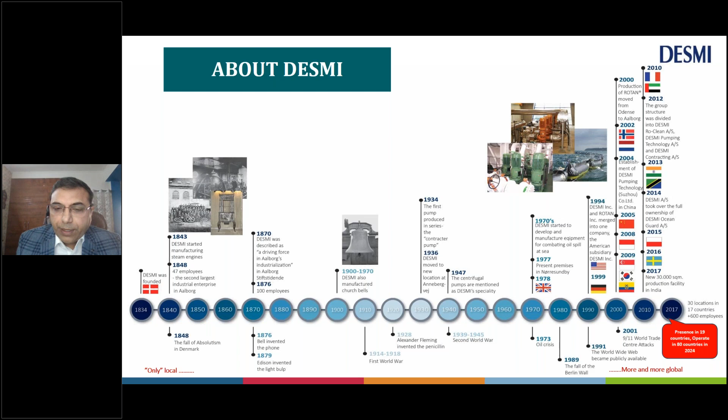We operate in primarily 5 verticals. These are called marine and offshore, where we make marine pumps for the shipping industry. Then coming to the industry vertical, where we make pumping solutions for the industry.

EnviroClean is the vertical wherein we tackle the issues of oil spill at high seas, the problem of seaweeds on beaches, and then the problem of marine debris, which is what I'll be concentrating upon.

The fourth vertical is defense and fuel. In this vertical, we make pumping solutions for the defense industry. We have our pumping solutions working with almost 25 navies of the world. Then we have the utility vertical, wherein we make pumping solutions for various HVAC industry, district heating and district cooling, those kind of applications.

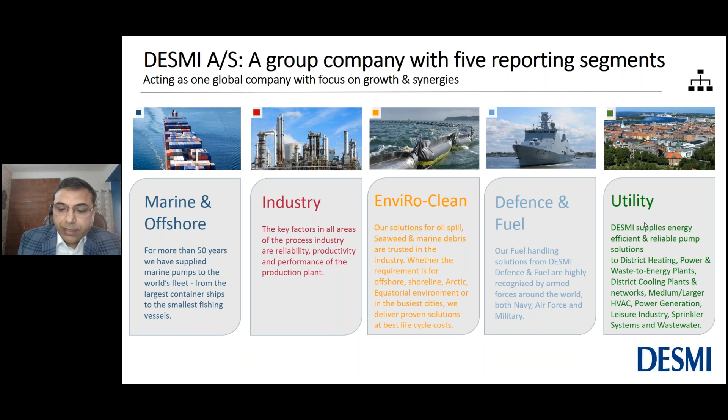So coming to the problem of marine litter, this is a picture which has become very, very common in Southeast Asian part of the world. And if these are the images that motivate you to work for the environment, then we are here for you.

There are some well-known facts about how the marine litter issue is affecting all of us. The first is that marine litter presents a huge problem in our oceans, with scientists sometimes warning that by 2050, the quantity of plastics in the ocean will outweigh the fish.

Very concerning. The marine litter or the plastic litter enters the marine environment because of a wide range of land and sea-based activities. This is where we have concentrated, and this poses harmful effect on marine life, biodiversity, tourism, fisheries, shipping, as well as negative impacts on human health.

5.25 million plastic particles weighing 268,940 tons in total are currently floating in the world's oceans, and these are increasing every day.

80% of our pollution in the ocean comes from land-based sources, and most developing countries dispose 90% water and 70% of industrial waste gets discharged into the sea untreated. So this is about how big, how grave the issue of marine litter is.

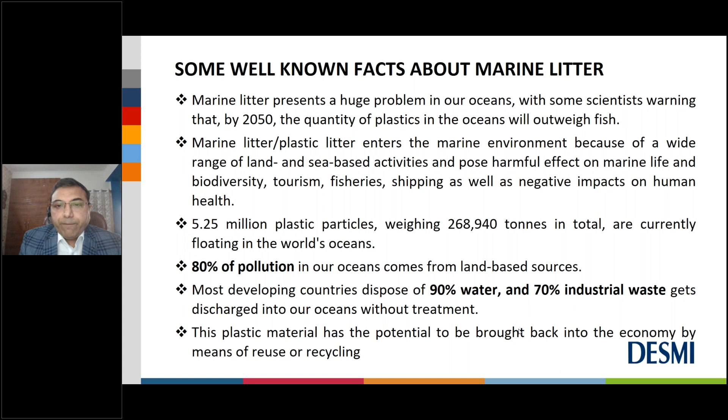So this is how the marine litter flows. It starts from the household. The data proves that even despite having the best of garbage collection mechanisms in our cities, still we are able to collect only say 40 or 50% of the garbage that is collected from home and disposed of properly.

Otherwise, whatever does not get collected gets disposed into the marine bodies, and it flows from one stage to the next, and ends up in the river or in the ocean.

Where DESMI EnviroCare concentrated was, we already have plenty of solutions, as you can see a few pictures down below, the floating trash skimmers. This space was already very cluttered, it was not very green, and it could not be deployed on a daily basis.

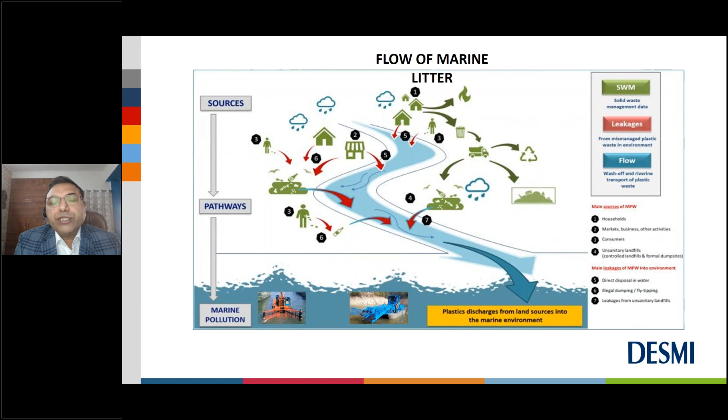It's an expensive activity to collect trash from floating trash skimmers. So we concentrated a little upstream. We said, why not concentrate from the source itself, and that's how our solution got generated, which I'll be covering in the subsequent slides.

In case the DESMI equipment is not there, here's how marine litter upstream is collected. As you can see in a few pictures, this is how it was being done in India, and I'm sure if automatic equipment is not used, probably this is how it is collected in most countries.

We use iron screens to stop the flow of water, and if it is not cleaned on a daily and regular basis, it becomes the primary cause for silt deposition and flooding. These are fixed structures which take time for both installation and uninstallation.

Then we use excavators to clean, which can be done occasionally because this has a hiring cost and it is operated on diesel, petrol, or whatever fuel, and it is not environment friendly, or it is done manually. These processes may have low capex, but they have high operating expenses. They leave carbon footprints and may disrupt traffic operations when we deploy them.

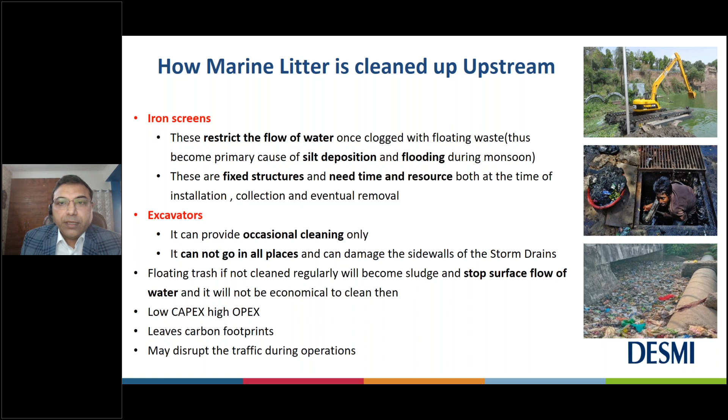That's how the EnviroClean division of DESMI was founded. We divided ourselves into three categories. One was the seaweed division, second was the oil spill response division, and the EnviroCare division.

Our seaweed division looks after the issue of seaweeds, which becomes a problem for countries where beach tourism is one of the primary sources of income. These seaweeds invade the beaches, and the beaches do not remain tourist friendly thereafter.

So we have solutions for seaweeds, wherein we not only contain the seaweeds but collect them and transport them at least 200 to 300 meters away from the sea, where they can be processed to get some kind of resource out of it.

Then we have the oil spill response team, wherein we have lots of equipment for removing oil in case of a spill. Coming to EnviroCare, which is where I will now concentrate in further slides, we do the job of containing marine debris and recovering it on shore.

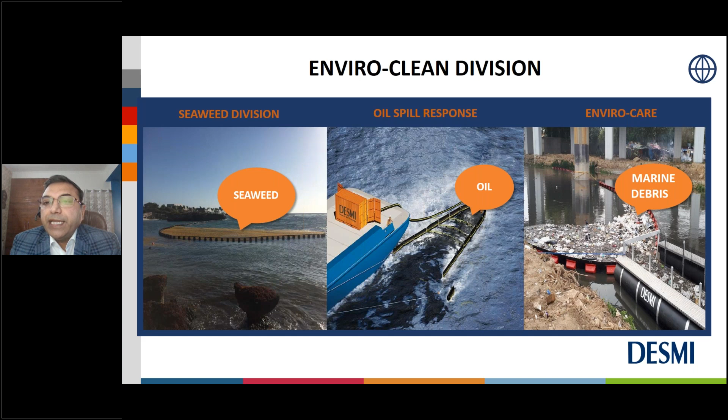We have certain equipment to do the same. The first in the series is the Enhancer series.

The Enhancer series, as you can see in the picture, is basically a steel basket housed inside a pontoon. This pontoon is made up of foam-filled HDPE pipes, which have very good flotation. On top, we have checkered aluminum plates so a person can move on it, and a steel basket in between with a hook on top that can be lifted.

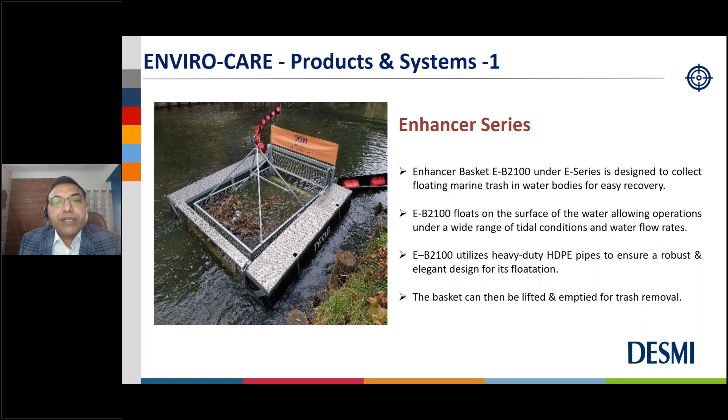So how it works is what I will show in the next slide. It has a video.

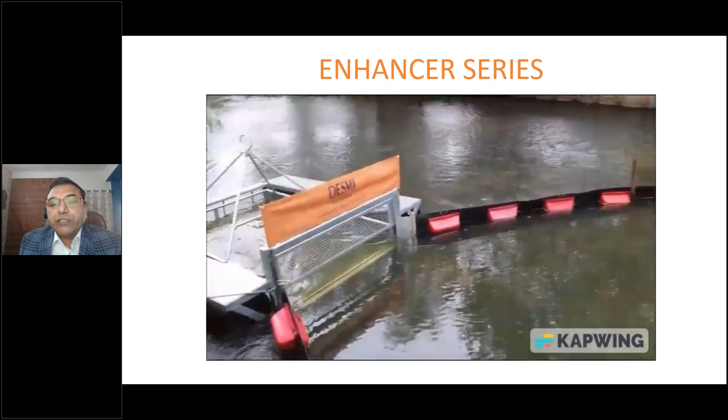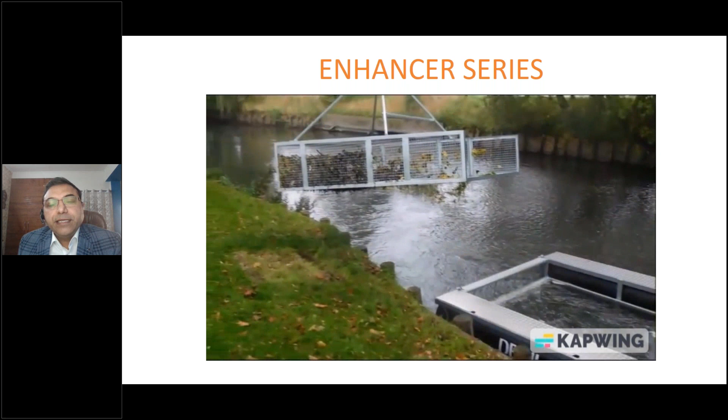The black and red color structure you see is basically a floating trash barrier. We put this across the width of the drain, and with the surface flow of the water, the trash comes inside this basket. The basket is then lifted, emptied, and put back.

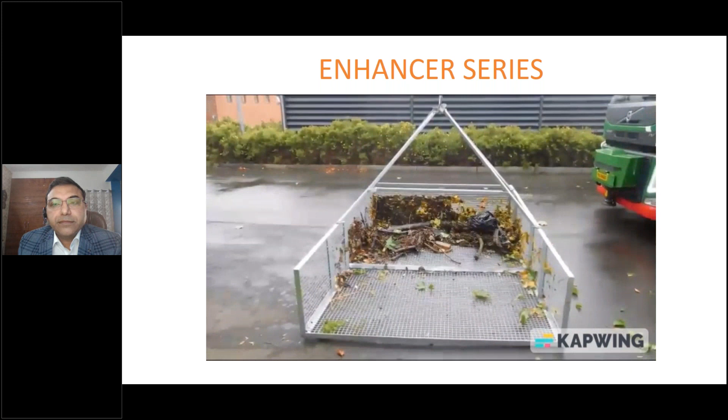The Enhancer basket had a capacity of 1 ton.

Coming to the second system, this is called the Rise series. Since in the Enhancer system we had to use a crane, which has to come alongside the system to lift up the trash, we devised a new methodology.

The Enhancer series was a little economical, but the Rise series addresses the problem of not having a crane. Many times municipalities may not have access to a crane, or hiring one becomes very expensive. So we came up with this automatic solution for collection, containing, and recovery of floating trash.

In this system, as you can see on the screen, we have two sets of conveyors. The first, following my arrow, is a wire mesh conveyor placed inside the water. Then we have another blue color conveyor, as you can see.

With the surface flow, everything comes onto the wire mesh conveyor where the water is drained out. It's almost dry, without any liquid content, and is dumped onto the blue conveyor, which transports the marine waste into a municipal bin, or we can modify it to place waste directly inside a dumper.

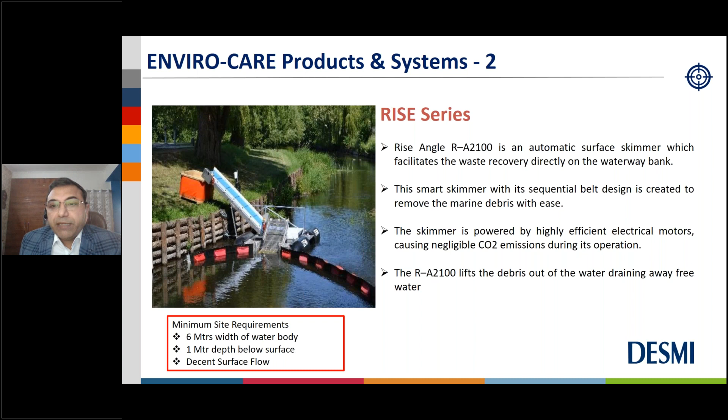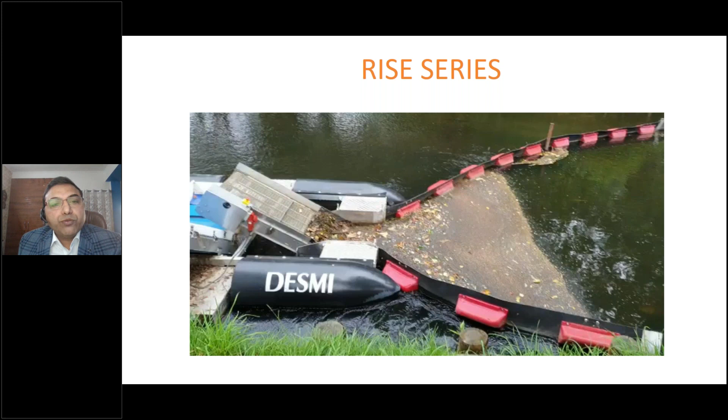I'll show you a small video of this as well. As you can see, the trash barrier has been placed across the width of the drain. The trash is forced into a bottleneck kind of position, and it comes onto our wire mesh conveyor, and this is how it gets lifted.

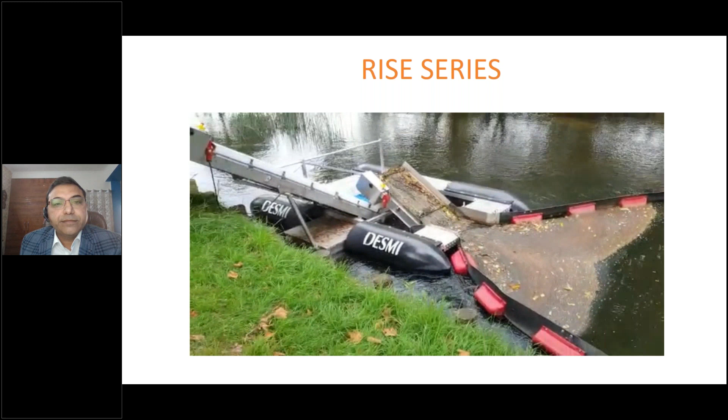The blue conveyor transports it directly into the municipal bin, ready for shifting, and this can also be done for municipal dumpers as well, in case it's required by the customer.

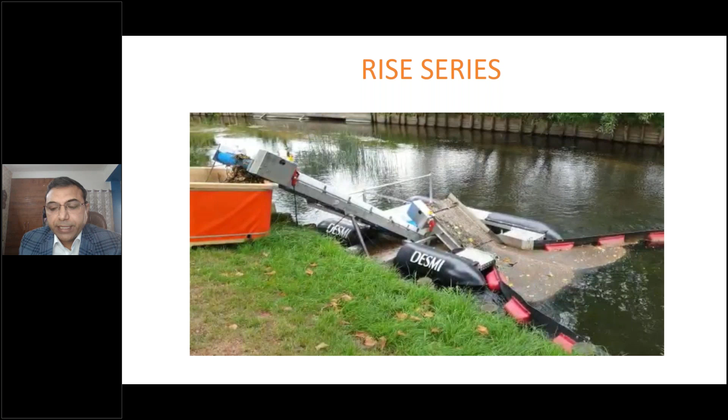Coming to the advantages of the DESMI RISE system observed over the last 4 years, the first and most important is daily cleaning. If we use excavators or iron screens, the cleaning activity is done at maximum once every 3 months, or before the monsoon. But with the DESMI RISE machines, you can do this cleaning on a daily basis.

This reduces the chances of flooding. Rains will come unabated, and there may not be forewarning. If an iron curtain is placed inside the drain instead of a DESMI RISE system, marine litter can clog it, and when it rains the water doesn't find a way out, the level rises, comes onto the street, and starts going inside the houses. Whereas with the DESMI RISE system, we have observed flooding instances in those areas have reduced drastically.

Similarly, if you allow the trash to just keep lying there, it becomes a sludge, settles at the bottom, and poses an even more difficult proposition for the municipality to remove.

It has very low emissions. As I said, it runs on just 2 electric motors of 0.55 HP, so it just takes about 1.5 units per hour.

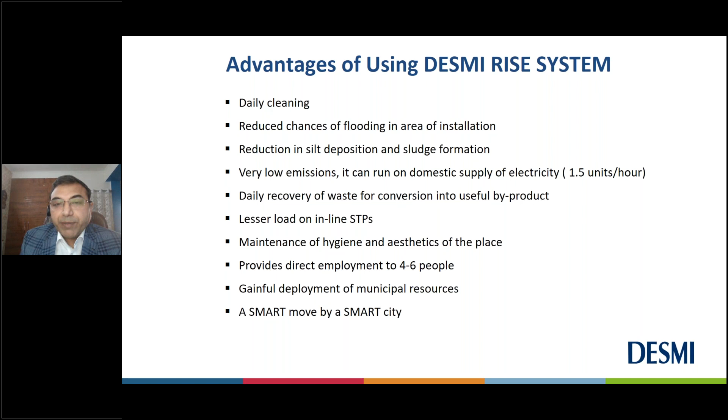This machine has been adopted under the concept of smart city in India, and many smart cities have taken over our machines. In fact, one more point brought to our notice in Mumbai was that a lot of fishermen have recommended our product to the municipal corporation. They say that once the marine litter is taken off, the quality of catch they are getting now is heavier. So they have recommended our product to the municipal corporation of Mumbai.

Since it is a technology, obviously there will be some limitations, and I will be very honest about these. Some of the limitations are that this removes only the floating trash. It should not be confused with the removal of silt from the drains. Silt is something which is lying at the bottom, and the conveyor is not designed for the bottom. To deploy these machines, we need at least 2 to 3 feet of clear depth from the surface.

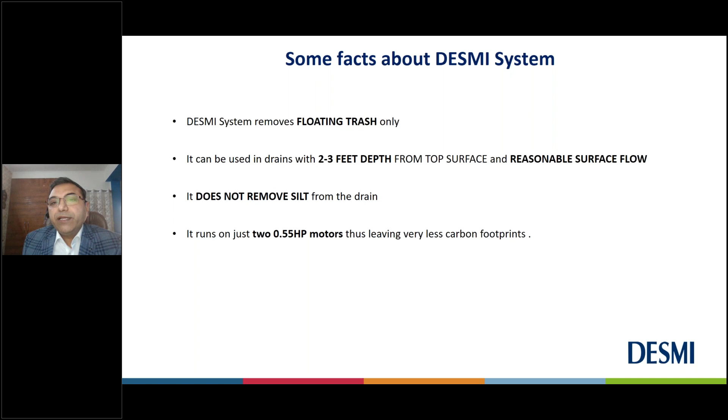This is required primarily because we have to deploy the trash boom. The trash boom itself has a width of about 600 millimeters, out of which 350 millimeters goes inside the water. So for that reason, we need a clear depth so that the floating trash boom can float on the surface, and if the depth is there, then the surface flow will also be very good, and the trash will come very easily to our machine, making it easy for us to remove.

This is the total project count that we have so far. We have about 24 projects running in India, and another about 13 projects running worldwide.

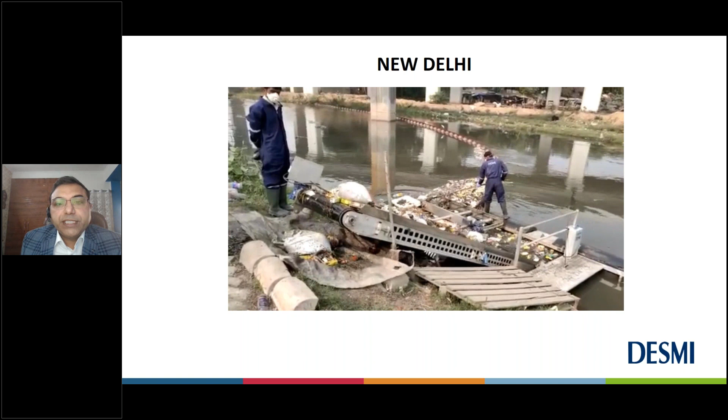I will show you some live videos of how we have worked in a few places in India. Coming to New Delhi, the drain you see right now on the screen is one of 3 major drains in Delhi, and this has mixed waste. There are hutments and settlements on both banks of this particular drain, and they throw domestic waste as well as a lot of things which come flowing in this drain, making it a mixed kind of thing. You see the gunny bags, you see vegetables, you see the polystyrene, you see plastics, everything coming.

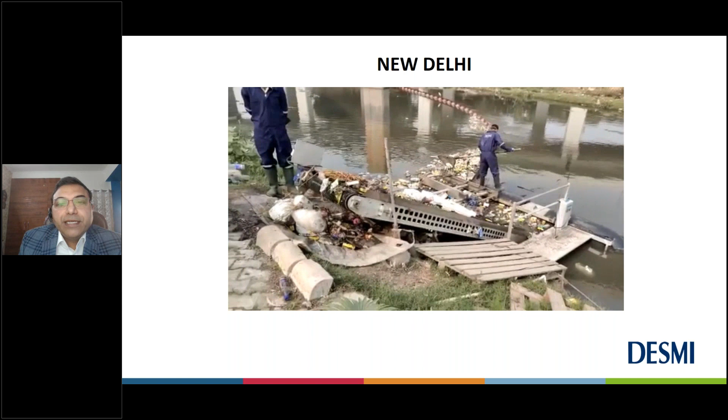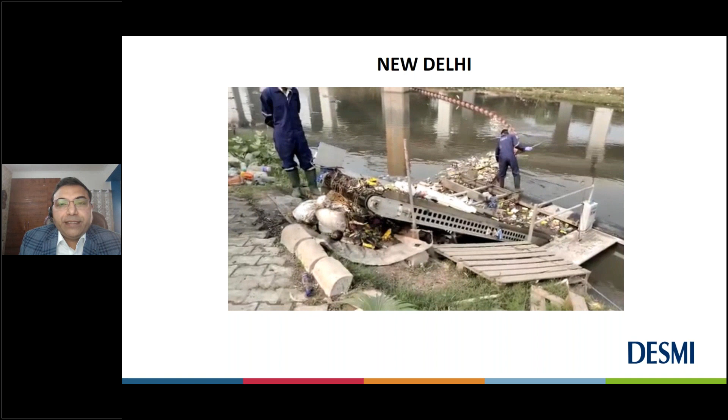It's slightly an older model that you see, you don't see that blue color conveyor here. This is the first model that we deployed. In fact, in 4 years of operations, we changed our machines 5 times to make sure it meets all kinds of challenges. We are always open, like if we venture into a new country, I'm sure there will be new problems, so this is how we are ready to customize ourselves to suit the requirement of the customer.

Coming to Bengaluru, we have deployed our machine in the drains of an IT park. This IT park had instances of frequent flooding, happening due to the water hyacinths you see on the screen, which were blocking the restriction in the drain. The water hyacinths used to get stopped there and kept forming layer after layer, causing frequent flooding inside the campus.

With our machine, we have been recovering these water hyacinths and other marine litter on a regular basis. We supplied one machine to them, and now they have 3 of our machines to tackle this issue. They have not had a single flooding instance in the last 3 years.

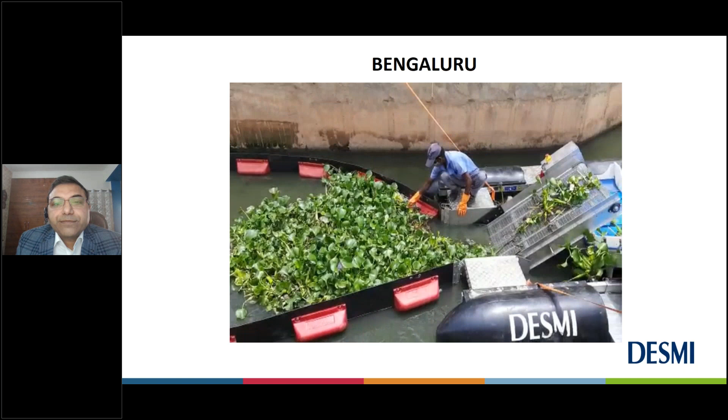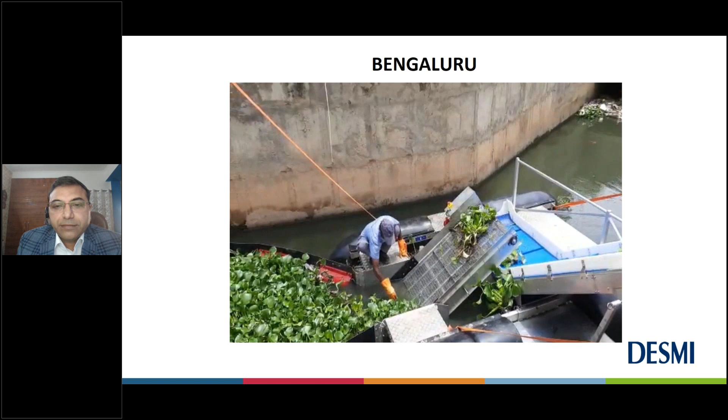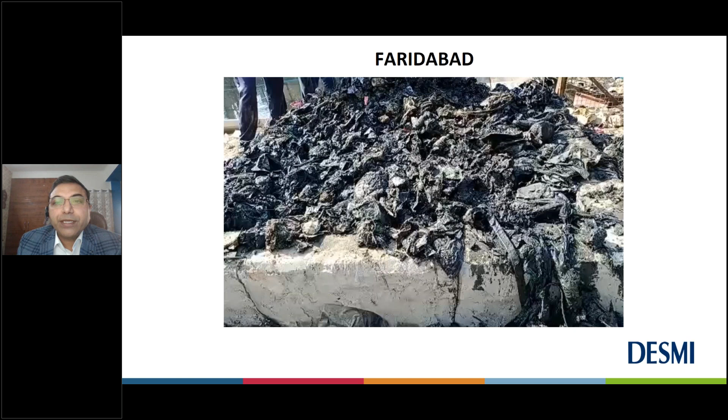After deploying our machines, we have been clearing this sludge. Although there is a lot of awareness now, so the frequency of cow dung getting dumped into the drains has reduced because of the awareness generated by our machine. But still, there are instances where small time farmers don't have resources to dump elsewhere, so they still continue to dump it in the drain. But we have been very prompt to dispose it on a daily basis.

On the right side, you can see it has become like kind of a stone.

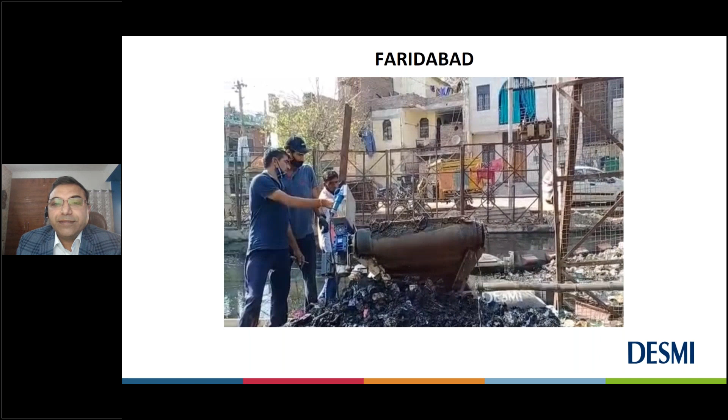Then there is a place called Hyderabad in Telangana, one of the states in India. There they have the Hussain Sagar Lake, which is one of the primary sources of drinking water for the city. This lake had about 5 inlet points, which were bringing in a lot of plastic trash, as you can see on the screen. This plastic trash was getting transported to the lake, and it was very difficult to make the water potable for the city.

So what the municipal administration of Hyderabad has done is place our machines on all 5 inlet points of the lake, and we have been running these machines day in and day out to clear this kind of plastic trash.

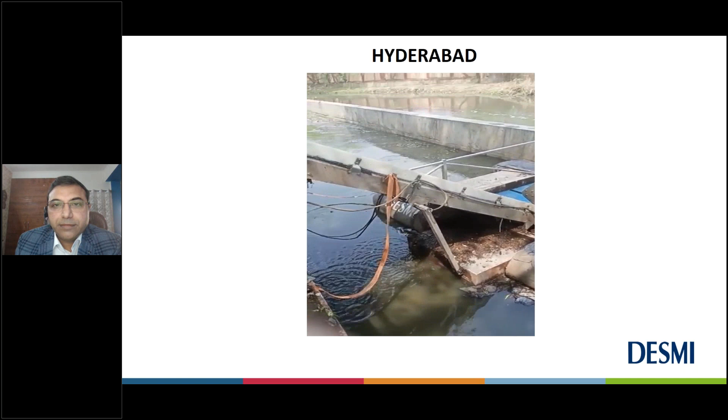Coming to Mumbai, a very big city in India, they have the Mithi river which has sort of become a drain now, with a lot of trash floating. It's a big city with a lot of slums, so there is a lot of dumping of marine litter in the river. We have placed about 9 machines in Mumbai now.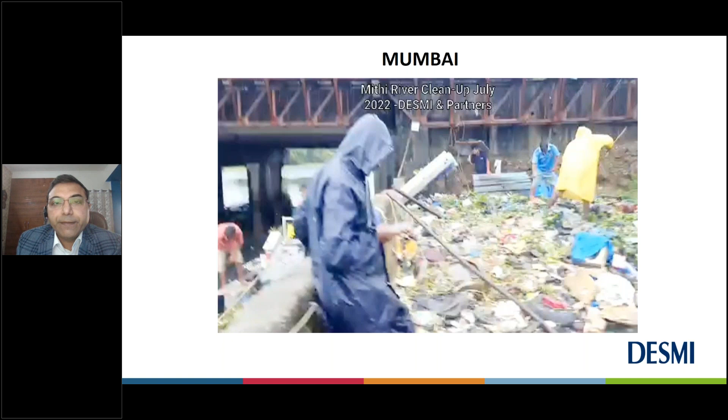Just one look at the kind of trash, the initial shot will show you how much water hyacinth and marine litter is there. We have been recovering almost 4 to 5 tons of marine litter every day from each machine, so it's almost about 36 tons every day that we have been recovering from the water bodies. You can have a look at the water hyacinths.

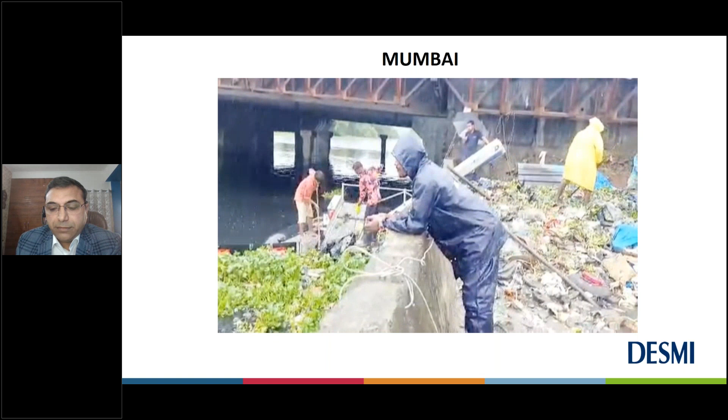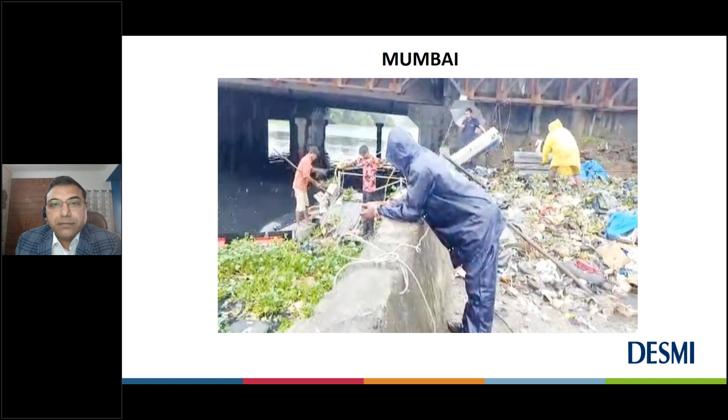This work goes unabated. I won't say 24/7, but depending on the quantity of trash available that particular day, almost 8 to 9 hours these machines run on a daily basis. During rainy season, when the flow is very good in all the water bodies, we run them 24/7, recovering huge amounts of trash daily in all the cities where we have deployed our machines.

Coming to the third product in our arsenal, the RO-Fence-600. This is basically a trash boom made up of neoprene rubber, designed to withstand harsh effects of abrasion, UV, oil, and marine degradation. It's a homogeneous single process construction, with complete cross hot vulcanization of rubber and reinforcing fabrics.

We have HDPE floats supplied along with this, which allow the trash skimmer to float on the surface and move as per the level of the water. To keep them straight, we have ballast weight of galvanized steel placed at the bottom. This has a total width of about 600 millimeters - 250 millimeters stays above the water and 350 millimeters stays below the water, allowing marine life to travel unabated.

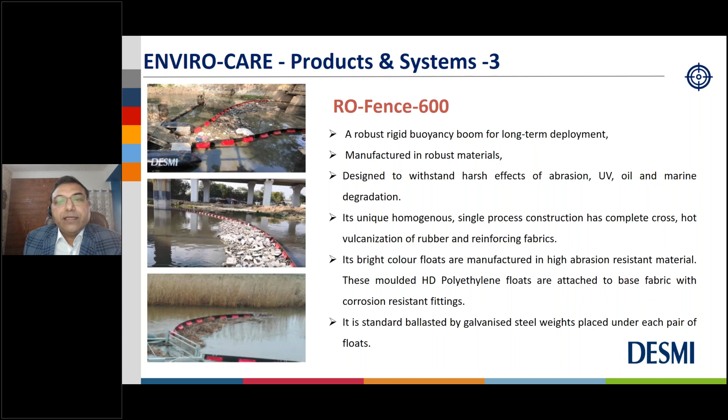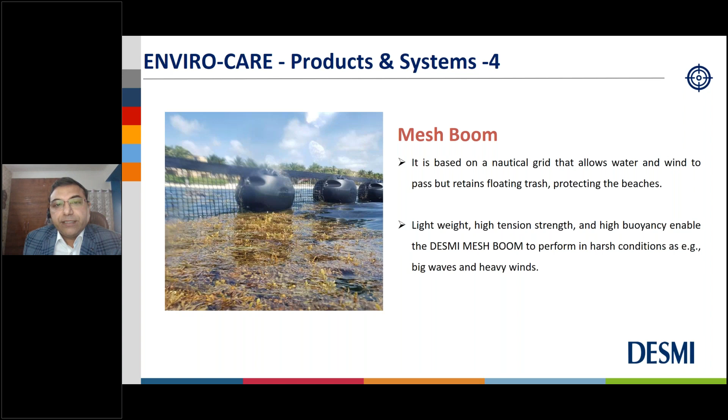The fourth system is called the mesh boom. It is basically a grid-shaped boom, again made up of neoprene rubber. It has grids of 1 inch by 1 inch, so water can pass through it, and we are using this mesh boom for stopping seaweeds which are invading the beach. I will show you a good video of this so you can get an idea of how the mesh boom works.

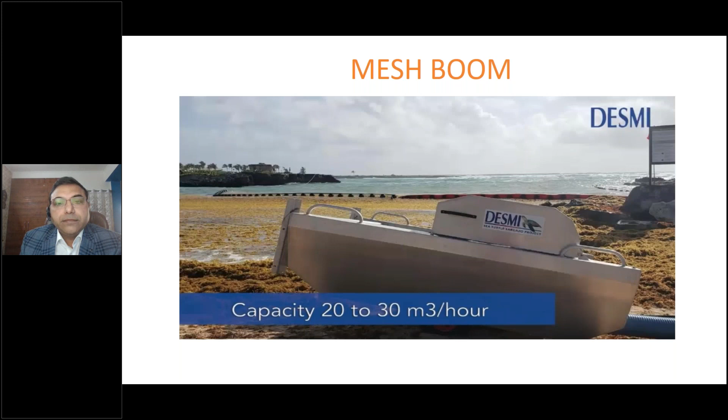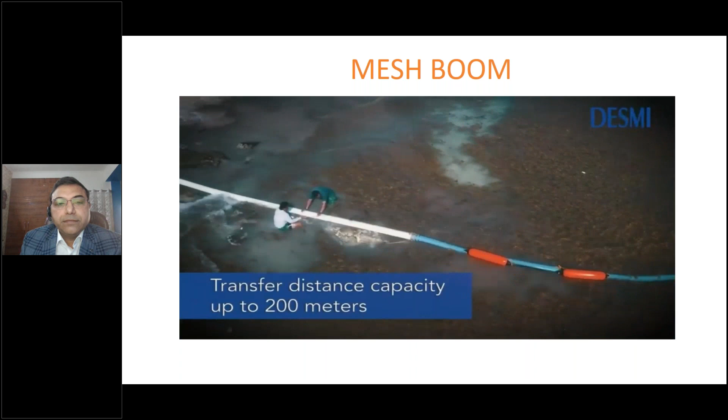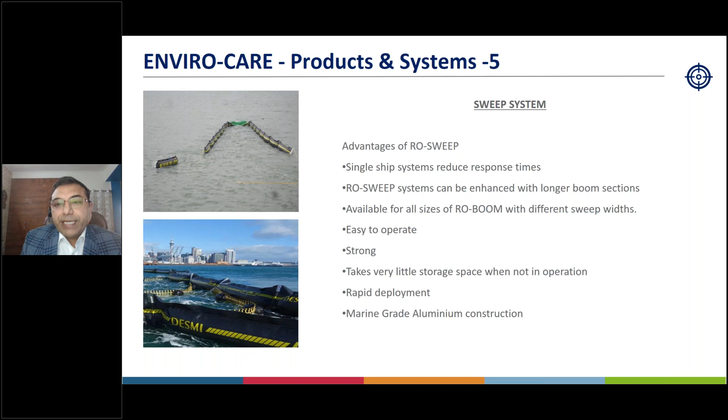In about 5 years of EnviroCare operations, we have been able to make environment-friendly technologies which provide circular economy benefits for our customers. It is empowering employment, reducing damage to the local environment and people. We have removed almost 25,000 plus tons of waste in about the last 4 years of operations, and this figure is increasing every day.

We endeavor to make waterways clean with positive impact on the waste sector and waste management education, because as our equipment is publicized and people come and see the kind of waste we are recovering every day, there is an awareness in people, and wherever these machines have been placed we see a drastic change in the pattern of how marine litter was thrown in these drains. We are contributing to various UN SDGs, empowering local government initiatives like Smart City in India, and these are low cleanup investments.

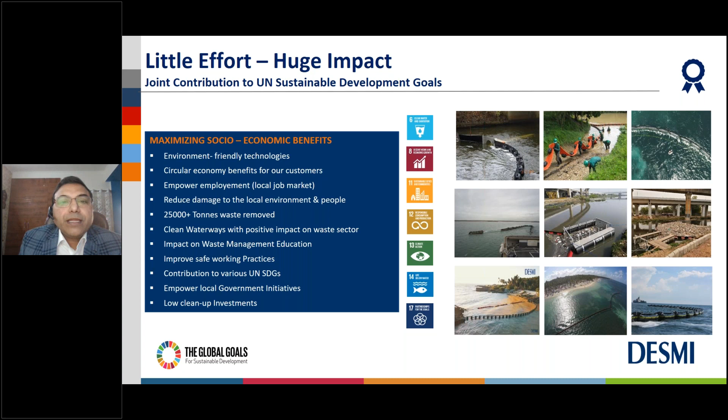As I'm told by Mr. Biram, the viewers, the constituents of this audience, may include many practitioners of waste management. And so I eagerly look forward to working with you in your country, in your cities.

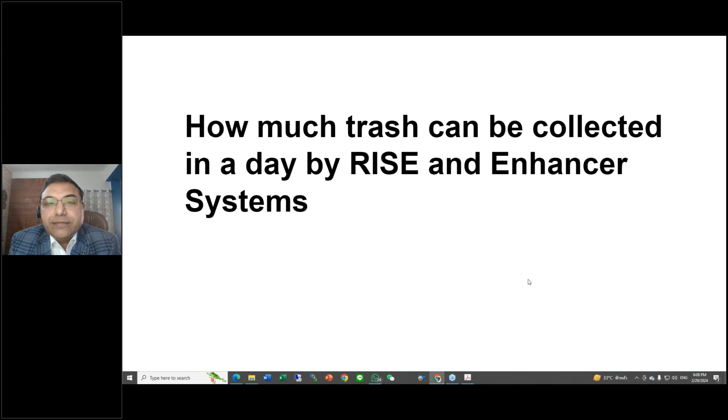Again, a very nice question. This is about the trash barrier - how stable are they as the water flow and wave intensity varies.

We usually use Rofen 600, which is made up of neoprene rubber with reinforced fabrics. So these barriers are very, very strong. There's absolutely no question of these barriers breaking from any point.

What we need to take care of is how we are fastening them on both ends - that is where the care has to be taken. The DESMI team will make sure these trash barriers withstand usual situations, and during exceptional situations like a tsunami or unprecedented rainfall, we need to take a little more precaution. Otherwise, in most situations, these will be stable and will work in any kind of flow.

We haven't experienced high wave intensity because in drains, rivers, and other places the wave pattern is not that intense, and with the highs and lows of water, Rofen 600 is very, very stable.

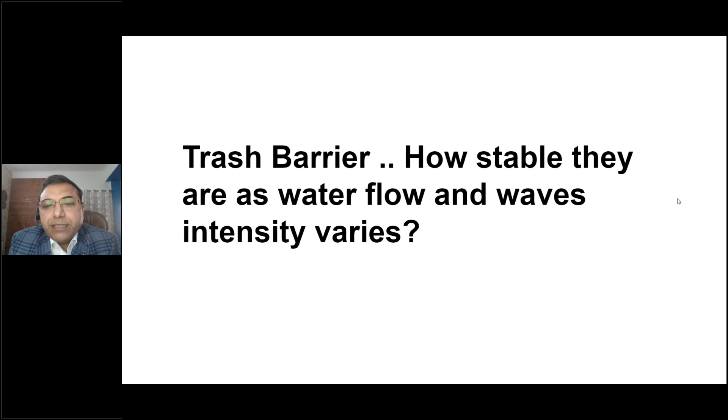What is the fuel consumption for the RISE system? The RISE system does not consume fuel other than electricity. The way we have made this system, it works on two motors. The enhancer does not require anything as such.

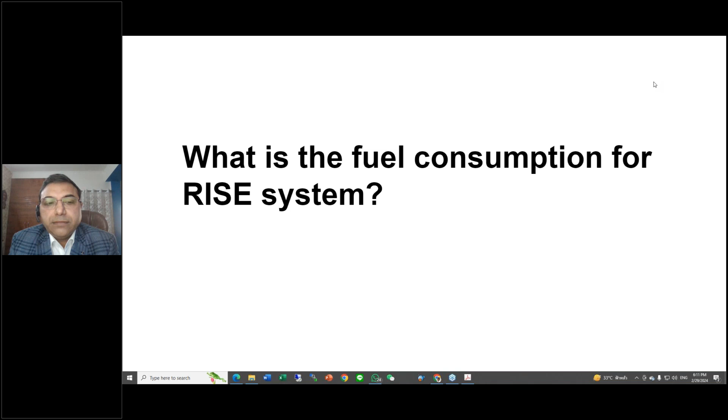Okay, go on Tarun. The question is, what is the maximum area of trash barrier that these machines can hold?

I'll give you a few examples from the installations we have done so far. We have had a minimum width of the water body of about 10 meters, and we have gone up to about 70 meters, where we used 200 meters of trash barrier. We have been able to cover them without any problem.

Wherever we have used a large quantity of trash barrier, say about 200 meters or so, we have to be very careful when the water flow increases during the rainy season. That's when we put additional arrangements for fastening - we reinforce them with more ropes, steel chains, or similar, so the trash barrier doesn't give way. So up to about 70 or 80 meters of width, we have been working without any problems at all.

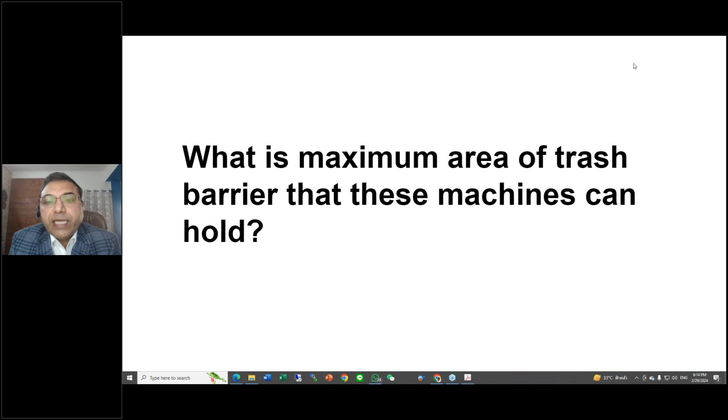The manpower required is only one person, to switch the machine on and off. But what usually happens is you cannot predict what will come in the drain - sometimes irregular sized trash comes and stops at the mouth of the conveyor.

So we have made the manpower requirement two. This gives flexibility - if one person is not present, at least the second person knows how the machine operates. So it's not only redundancy in the manpower system, but also one person can go down and straighten out any disruption caused by irregular trash blocking the conveyor mouth, so the machine can operate again. I would say two manpower would be sufficient to operate this machine.

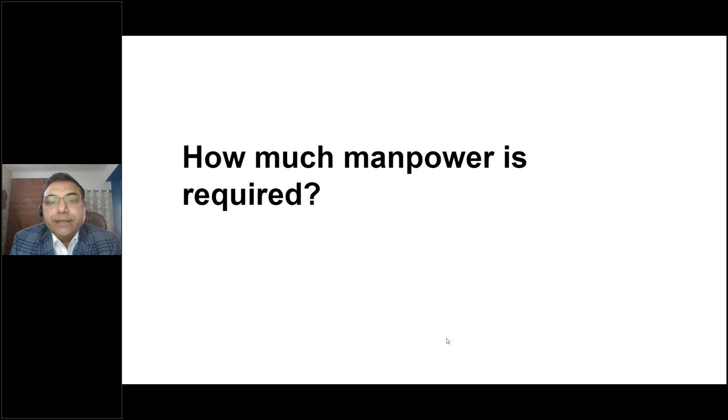Can it be shifted easily based on requirement? Yes, absolutely. But there is a catch, because the machines run on electricity.

Once you install it, you would have made some kind of electrical arrangement there. So when shifting it, make sure a similar electrical arrangement is made at the new point as well. We have made these machines so they can also run on a portable genset, because sometimes you may not find an electricity point next to the drain.

So we have made this kind of alternate arrangement on our RISE system. You can run it on a portable genset, and the equipment can be easily shifted. If the water body is the same, you can just float it and pull it by rope to another point. Otherwise, it would take about two rounds on a 9-foot truck. You can shift the machine very easily. This machine is not at all heavy; the total weight would be about 1.5 tons.

Can we monitor the systems remotely when there is a crisis situation like heavy rains? The correct answer would be no, and I'll tell you why. We wanted to make a simple system because it would in all probability be run by waste pickers. Their education level, I'm not sure - in India it is not much, and I can't say about other countries, but I suppose the people allowed to work on this system may or may not have the literacy required to operate sophisticated systems attached to the machine. But that's not a very big issue in this age of heavy technology floating around.

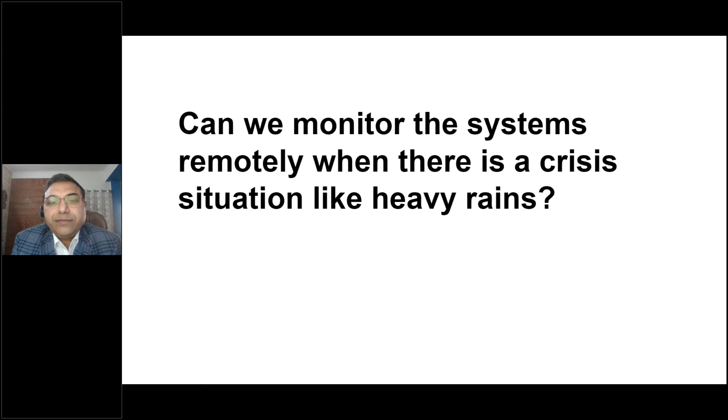Wonderful question - what is the constituent material of the system? The constituent material is stainless steel and aluminum, and both are marine grade.

Anytime you are visiting India, come over, give me a call. I'll take you to one of the nearest places to show you that not a single rust mark can be found on our machines. These machines do require a little bit of cleaning because you are dealing with trash after all, so once in 10 to 15 days the machine requires some cleaning. You don't have to take it out - just put some fresh water on top of it, and everything would be absolutely fit and fine. We have certain moving portions because of the conveyors, so once in 6 months you might need to put some grease oil on it so the moving parts move seamlessly. With the constituent material, marine grade steel and aluminum, you will have absolutely no problem.

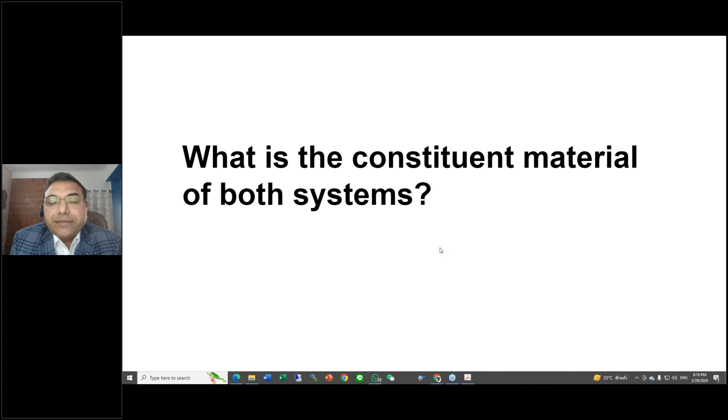I can always speak on the oil skimming process - we have various kinds of skimmers in our system, and the DESMI EnviroClean takes care of that. But I would not be the right candidate to speak about oil skimming because, as I said, there are three divisions: seaweed, oil spill, and marine debris. I look after and am proficient in the marine debris division, but if you have any specific questions on oil skimming, just write to me and I will make sure you get the answers you're looking for. You can also visit our website, where you'll see all kinds of skimmers we have in stock, and any questions thereafter you can just throw at me.

The question is, we usually get huge wastage during festival periods, something which is the same in India - an uncertain amount of waste gets generated, no issues. How do we deal with this situation of huge waste in waterways during a short period? The answer would simply be: deploy our system. We have the same problem in India as well.

During festival periods, items used for religious offerings and so on are thrown into the rivers, and suddenly there is a deluge of such material which nobody even wants to touch. Our machines have been working wonderfully in the rivers. There is no certain amount that can't be collected through our machine - our machines can work 24/7 if required. As long as there is good surface flow where you observe this kind of waste during the festival period, I will make sure it gets cleared in the smallest possible time.

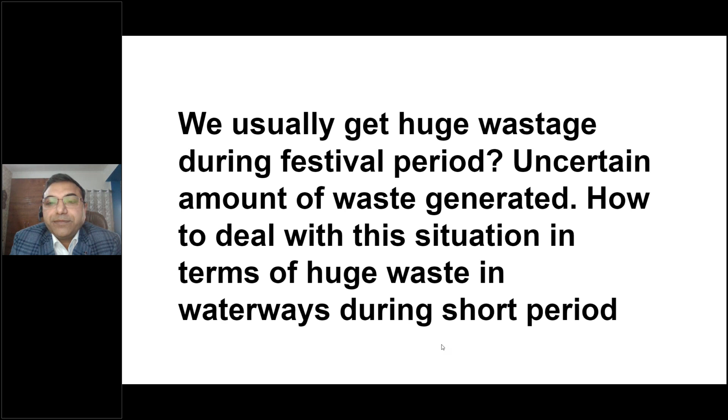What kind of maintenance issues are involved in operating these machines? As I said, we have not made these machines very complicated by putting GPS, cameras, SIM cards and this and that. So the maintenance of these machines becomes very, very easy.

These machines stay in putrid water, so they need occasional showering of fresh water so that dirt particles stuck to the surface get cleaned off. Once in a while, like once in two years or twice a year, we can take the machine out of the water. This helps with dredging, because all kinds of waste stop at the machine and some of it sinks to the bottom, so we dredge for about half an hour to an hour so that point becomes free for flow again.

Once the machine is outside the water, we allow it to dry and oil and grease the moving parts. There are wheels on which the conveyor moves, so you just need a little oiling and greasing of those parts. Other than that, there is absolutely no maintenance issue.

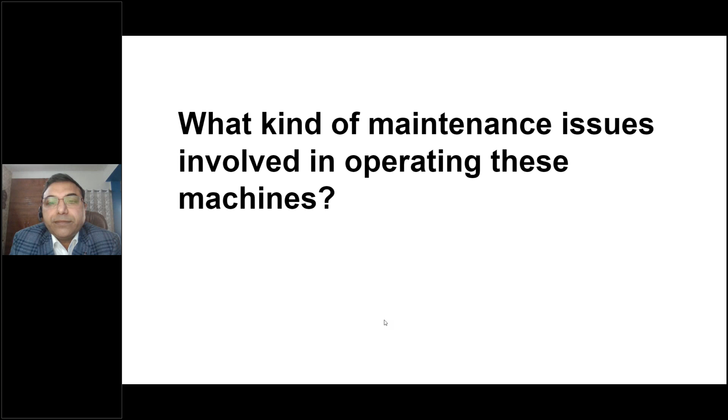Is it possible to deal with used sofas and mattresses with these machines? Yes, if it is floating, there is absolutely no problem. Any kind of floating material can be recovered using our machine, whether it is sofa, mattresses, or anything for that matter.

We have faced this problem many times in Delhi, where people throw all these kinds of things in the drain, and we have successfully recovered sofas and mattresses as well.

All you need is surface flow, that's about it, and a clear depth of about one meter. My machine can do anything.